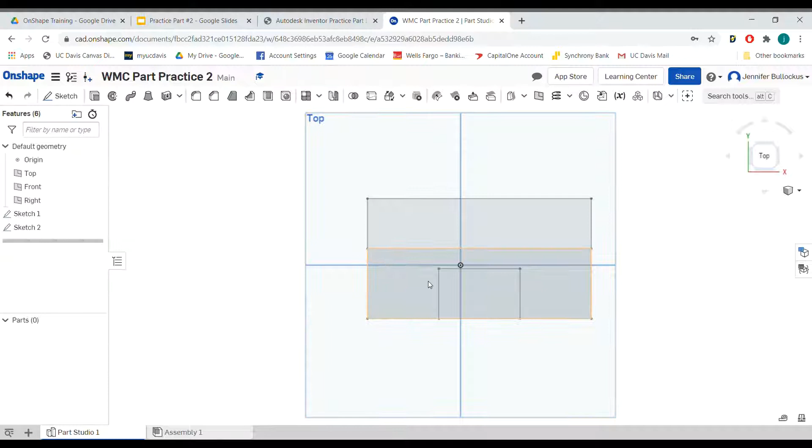Okay, now that we have our two sketches here, we can go ahead and start extruding. So I'm going to hit extrude, and I'm going to extrude this back feature here first, and that is going to be 80 millimeters tall, so we can go ahead and hit enter.

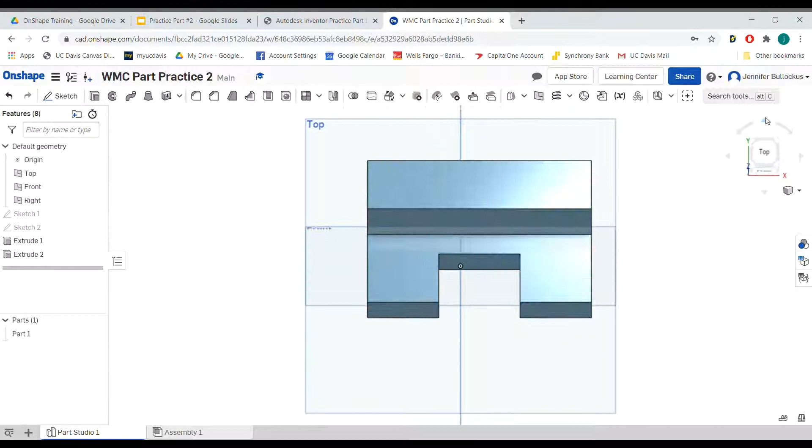And we can see here that it extrudes it. And then next we're going to extrude this section right here, so we can see that it highlights just the part we want extruded, and that is going to be raised to 30 millimeters. We go ahead and hit enter on that, hit OK, and we can see from here we've got the nice shape going that we want with the nice cutout going on. Alright, cool.

So then the next thing we can do is go ahead and do the two holes. So we're going to need a front view for this, and we're going to...

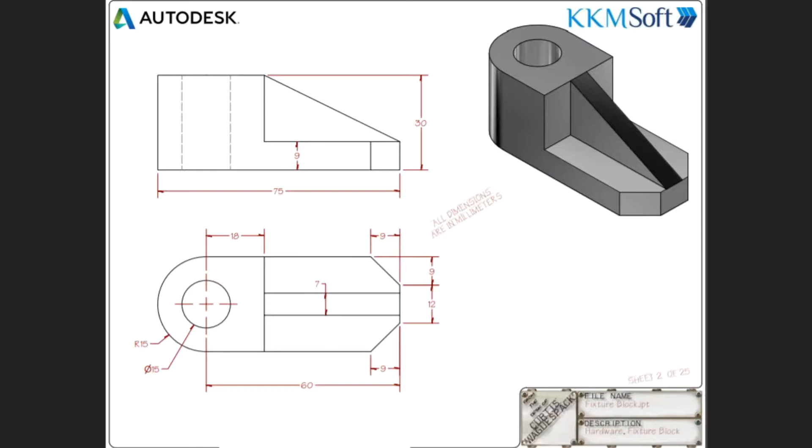Alright, so we have our document here set up on OnShape for our part practice number 2. And the first thing I'm going to do is, just like last week, check our workspace units, because it's automatically set to inches, but all of our part drawings from this Autodesk Inventor practice set are in millimeters.

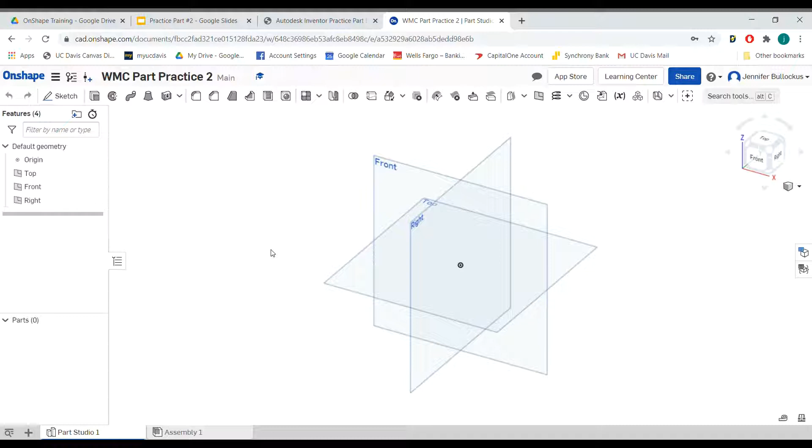We're just going to go ahead and put it in millimeters for convenience. Okay, so the first thing I'm going to do is pick the top view and go ahead and draw the base cube or square of our part here. So go ahead and sketch. I'm going to sketch with the top view. Click on the top view so we can see it clearly.

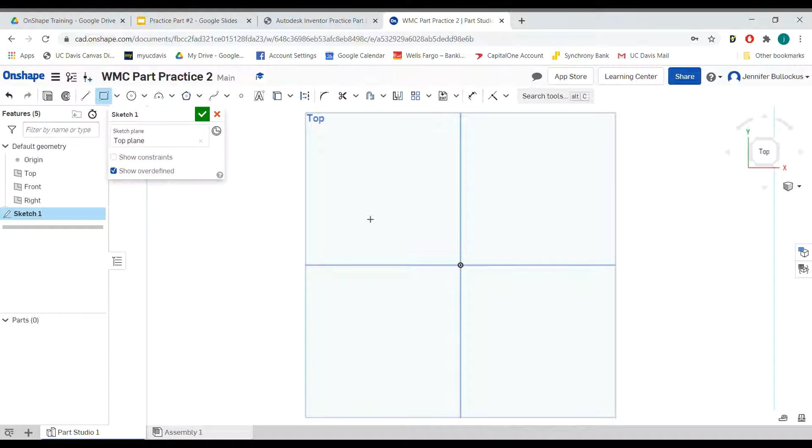And then the base of our rectangle here is 60 in depth. Okay, well, let me first draw the rectangle, that would help. So go ahead, draw a rectangle, and it looks like it's 60 in depth. Oh, let me escape the sketch, then dimension here. It looks like it's 60 in depth.

There we go. And then it's 35 plus 40 plus 35. So you can go ahead and do that math in your head, or, no, I don't want to dimension that, I want to dimension this length. So anyway, you can either do the math in your head, or you can just type 35 plus 40 plus 35, and it'll do the math for you.

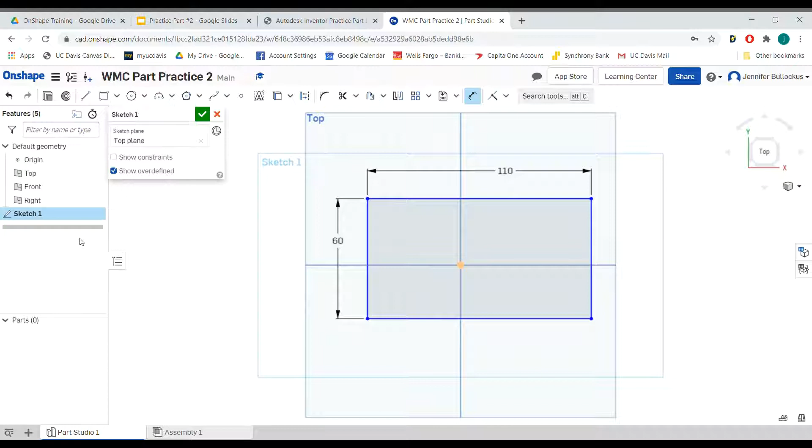Easy peasy. Alright, cool. And then what I'm going to do to add to this sketch, like I did again last week, is because two different sections will be raised to two different heights, I'm going to go ahead and draw a line so that when I do, what's the word for it, when I do extrude it, it's going to make it a lot easier. And this is set, let's see, 25 from, so let's go ahead and dimension that.

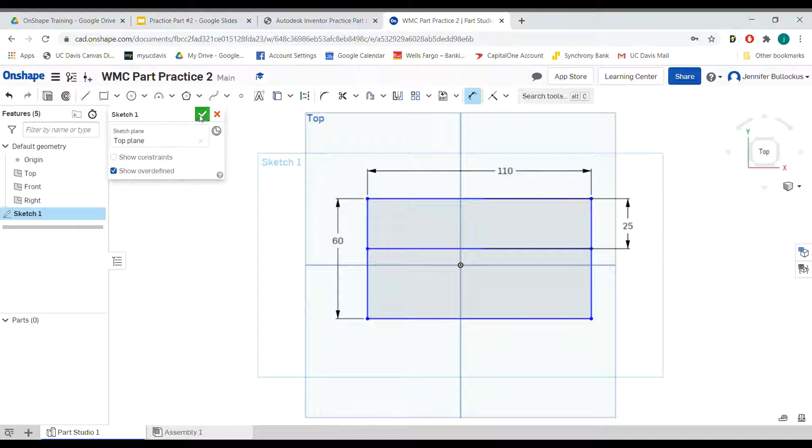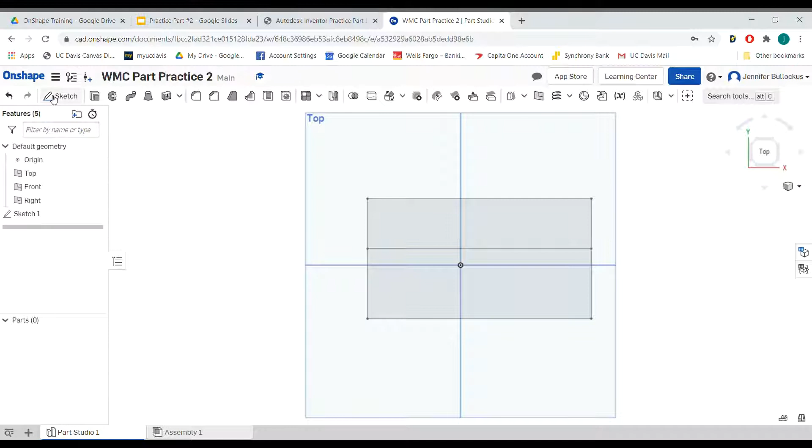Alright. Now we have our first sketch here, and now we have two options to proceed. We can either draw in our sketch now of like the cutout we're eventually going to do when we extrude, or we can wait and draw it on the surface after we extrude. I personally like to have all my sketches in at the beginning, so I'm going to go ahead and sketch it now.

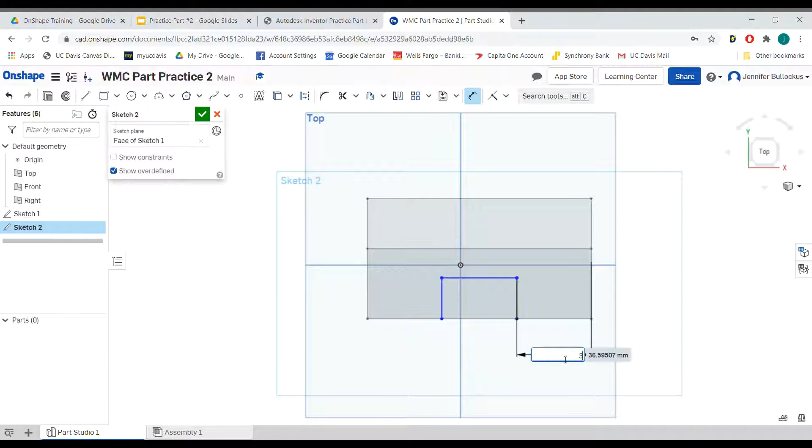And for this one, I would recommend just doing lines instead of drawing the box, so that way you can dimension it an appropriate distance from the other lines without having the constraint of it being a rectangle. So first, the distance from here to here is 35 millimeters, and then we want to mirror that on the same side.

Since we've set up this shape, the length of the entire rectangle will automatically be 40. If we add that measurement now, the drawing will become over-constrained because we've already marked the entire length of this rectangle. Adding the 40 will over-constrain it, and we'll get errors from Onshape saying we've put too many limitations on it. The height here is 25.

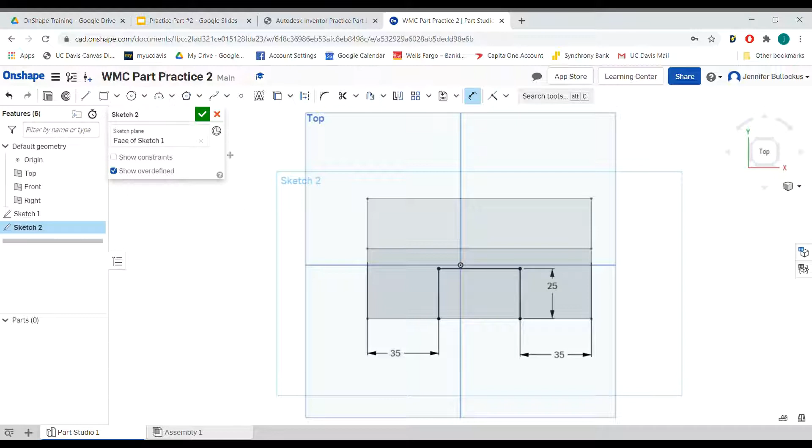Now we have our sketch fully defined on the face of the other sketch.

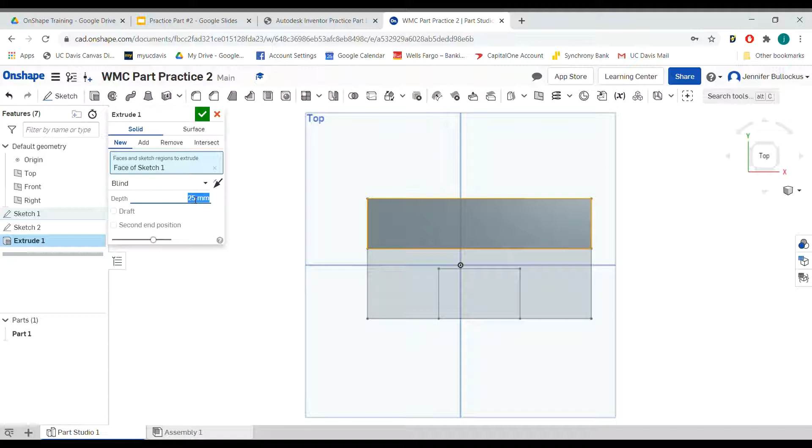Now that we have our two sketches, we can start extruding. I'll hit extrude on this back feature first, and that's going to be 80 millimeters tall. We can hit enter, and we see it extrudes.

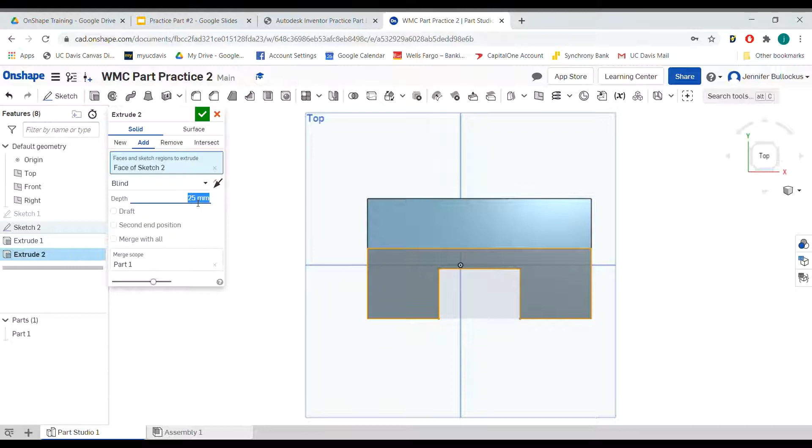Next we're going to extrude this section right here, so it highlights just the part we want extruded, and that's going to be raised to 30 millimeters. We hit enter on that, hit OK, and now we've got the nice shape we want with the cutout going on.

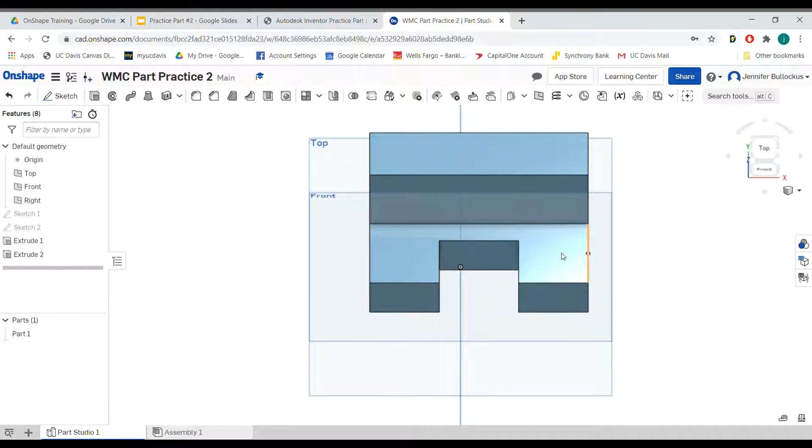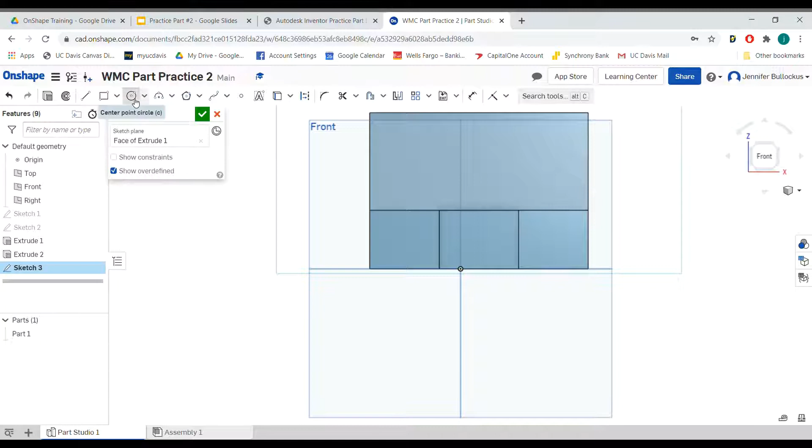The next thing we can do is the two holes. We'll need a front view for this since it's time to drill the holes. We'll add a sketch on this plane, then click on the circles tool and add a circle right here, and another circle right here.

When dimensioning these holes, you need three different kinds of measurements. If you imagine this as an XY plane, you need its X direction, its Y direction, and then its depth, or any information about the hole itself, like sinks. So X, Y, and the depth of the hole are the three measurements you need.

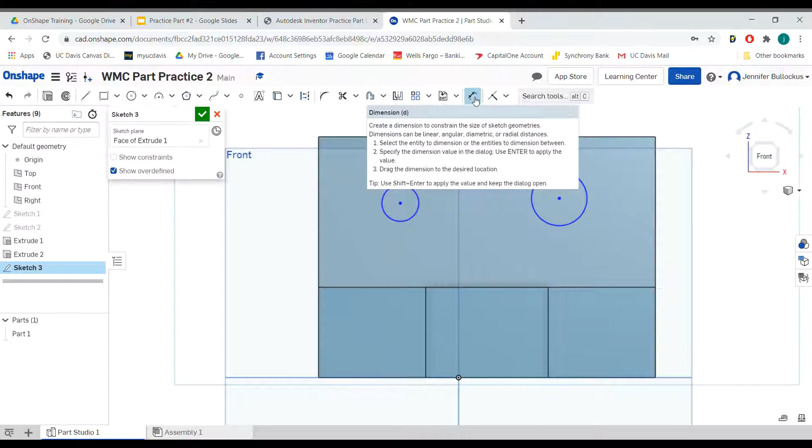First, our radius of the hole looks like - let me escape this and take a look. Right here it says diameter 6 through, then it has this symbol which means a counterbore, 12, 5 deep, and then 2 place.

That means 2 place - starting from the bottom, this is true for both of the holes. 6 through means the diameter is going to be 6 all the way through. Then this counterbore is going to be 12, which is like double the diameter of the through hole, and it'll be 5 millimeters - I might be saying inches but I mean millimeters for all of these - 5 millimeters into the hole we've drilled, or into the surface.

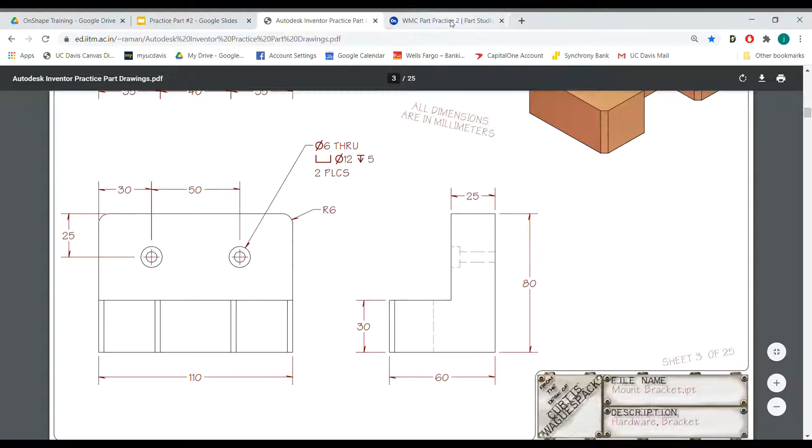So this needs to be 6 millimeters, as well as this one.

When it comes to dimensioning holes, there are two ways to do the X and Y direction. The first one is to start with a zeroing point. So let's imagine this is our 0, continuing this X and Y analogy, like an XY plane happening here.

We're going to measure the X direction of this circle, and we need it to be 30, making sure we're clicking the center - it's 30 from the center, not the edge of it. Then we need the Y direction, dimensioning from the circle to this line.

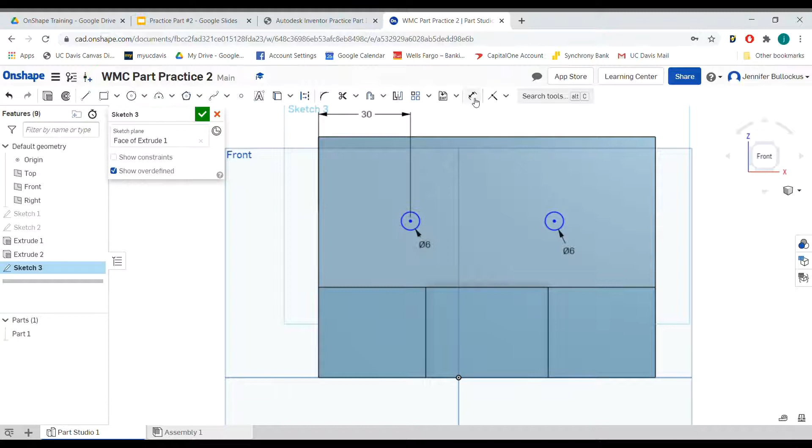Sorry, I need to do the Y direction, from the circle to up here. Okay, 25. So we have this hole dimension right here. We've got its depth, we have its X, and we have its Y.

Now, dimensioning this hole, we don't want to dimension it the way we might think. We could start dimensioning it the same way we did on this side, reflecting it on this side and dimensioning using these lines. But the reason we don't want to do that is because when we have to machine this part...

You will learn later on how to machine if you haven't had that experience yet, but we have to zero a point on the machine. So if we're going to be drilling this hole, we put our drill bit against the edge of the part, and we mark that as our zero, so that when we move our drill bit, like the 30 millimeters we need to drill this hole, this is our marker, 30 millimeters from this point.

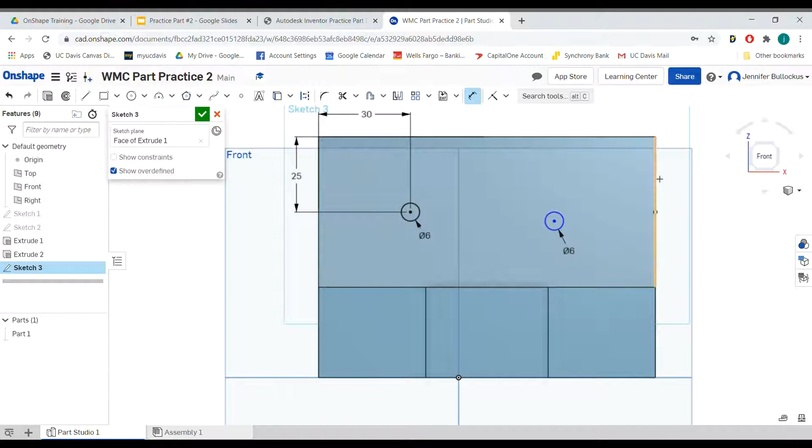So if all of a sudden we start measuring from this side for this hole, then the machinist is going to have to re-zero their machine, and instead of using this line, they're going to have to reset up their part so the zero starts from here, and then the machine will count 30 millimeters this way. That is just not efficient, not a good way to set it up.

So we want to use the same line, the same axis. Imagine this being the x-axis, this being the y-axis. We want to measure from these lines and not pick a new axis to measure from. So with that being said, we have two ways to do this.

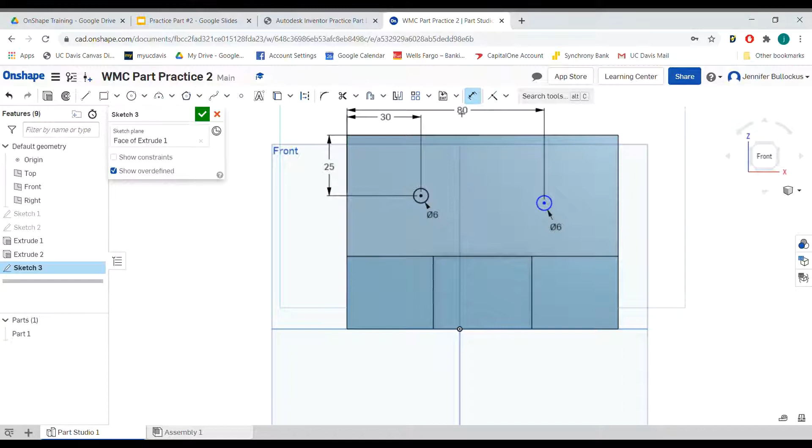We can either measure this hole along the x from our x itself, so that way we have another one, because it's measured 30, 50, so you can do that and have it set to 80 like that, and then you just know from this zero you should go all the way to 80.

Or another way you can do this is you dimension from this hole, oh, I don't have the dimensioning clicked, from this hole to this hole. And the reason you could do that is it's this method, called a cumulative method.

So once you get to this point, which you're going to have marked out on your machine, it will know you've gone 30, and then you can go another 50 from there, and you don't have to restart from the zero, or make the machinist do the math of 80 minus 30. Either way works, as long as we're, like I said, using this as our reference point, our zero.

And then we're going to go ahead and measure the y direction of this as well. Oh my goodness, sorry, y direction. Here, and set it to 25.

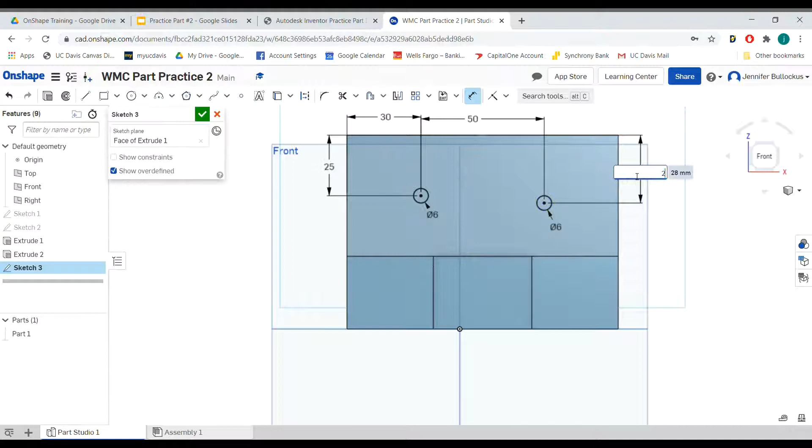Cool, so now these two circles are in line, and they're dimensioned from the same axis, and it's easy for the machinist to go ahead and machine this part.

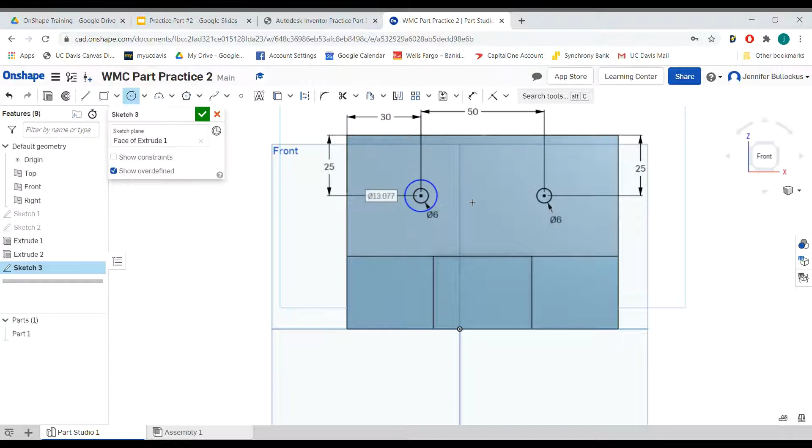The next thing we are going to do is add the circle, in addition to these circles, that's going to eventually be the counterbore. So I'm going to go ahead and add a sketch of a circle, making sure that my center is the exact same center as the other one, so that way the holes are lined up when I dimension them.

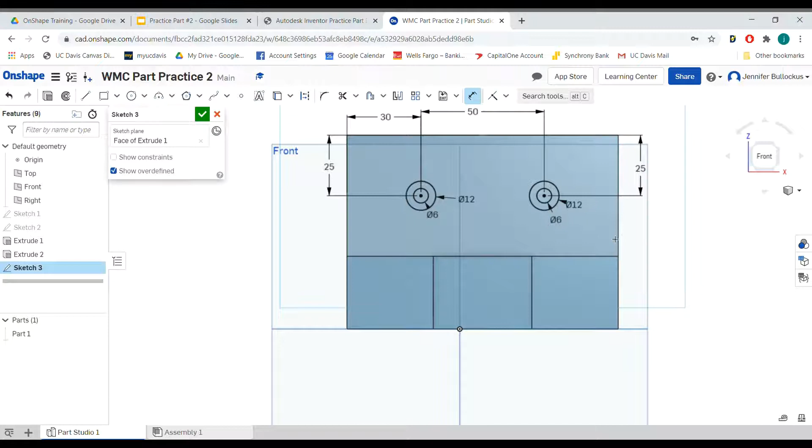So let's go ahead and dimension this diameter, which is 12, and this one will only be going in 5 millimeters, while the 6 millimeter diameter hole will be going all the way through. I'll show you how to do that in a minute. So go ahead and click OK on this sketch.

And now it's time to extrude. So when we hit the extrude feature here, what we're going to want to extrude is this one and this one, and we're going to want to remove. So click remove, and you can do through all like that.

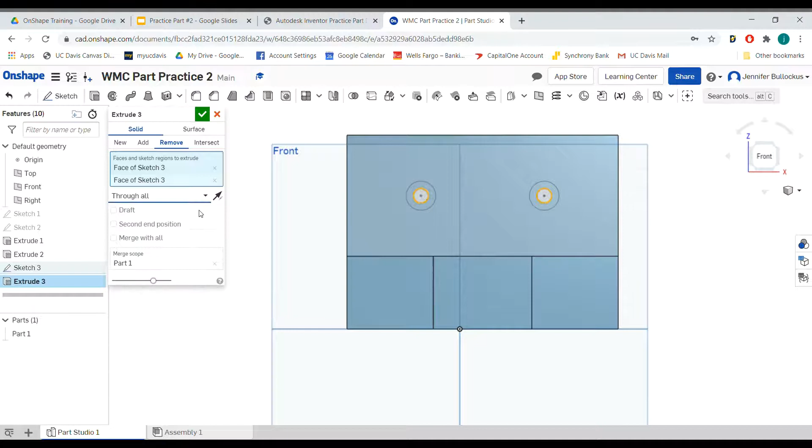Clicking through all means it's going to go through anything that's there. Even if we had several layers of stuff, we're just going to cut through all of it, and we'll hit OK. And as we can see here, now the hole is all the way through, front view. Then we got the hole all the way through.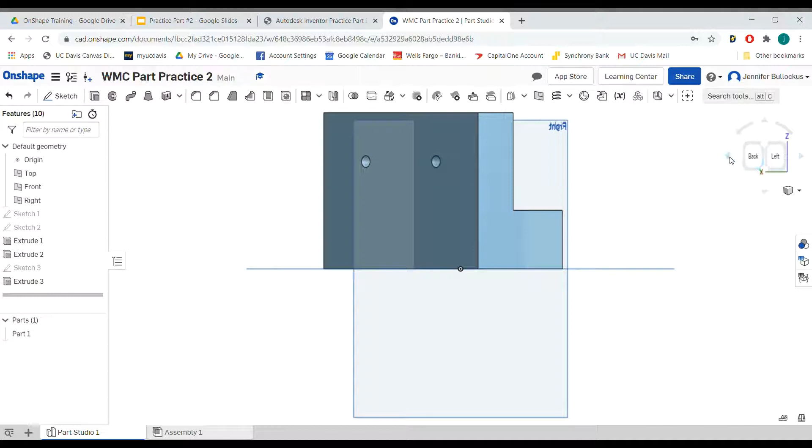Okay, so now going back, we're going to make our sketch 3 visible again because now we need to extrude the countersinks.

The reason we have this countersink is because the head of a screw is bigger than the threaded part. So if we don't want the screw emerging from the surface of our part, and want a smooth surface instead, we create this countersink so that the very edge of the surface is smooth and the screw won't bulge out.

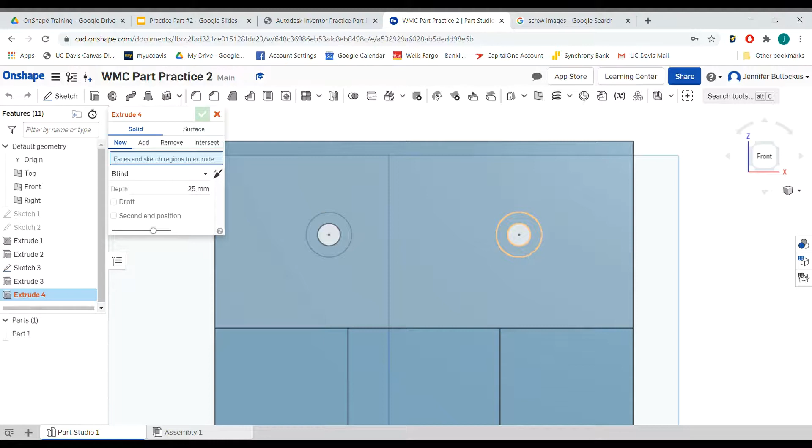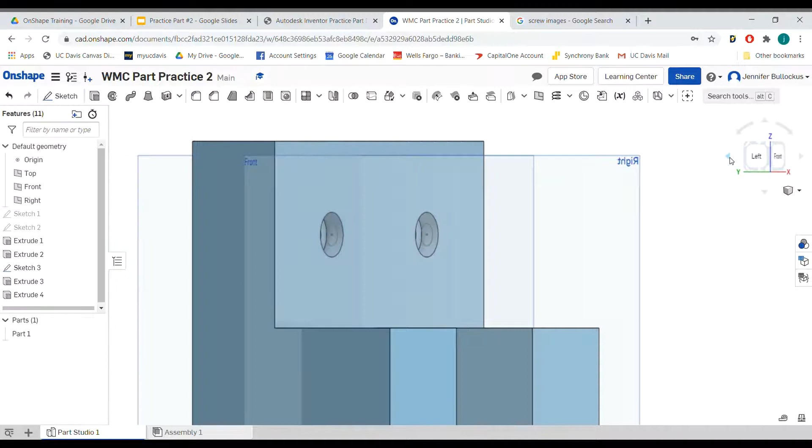To do that, we're going to extrude once again. Click the larger circle shape, then it's going to be a remove, and the depth is only 5 millimeters. We click OK. You can see from this angle that the countersink only goes 5 millimeters in, and then the rest of the hole goes all the way through.

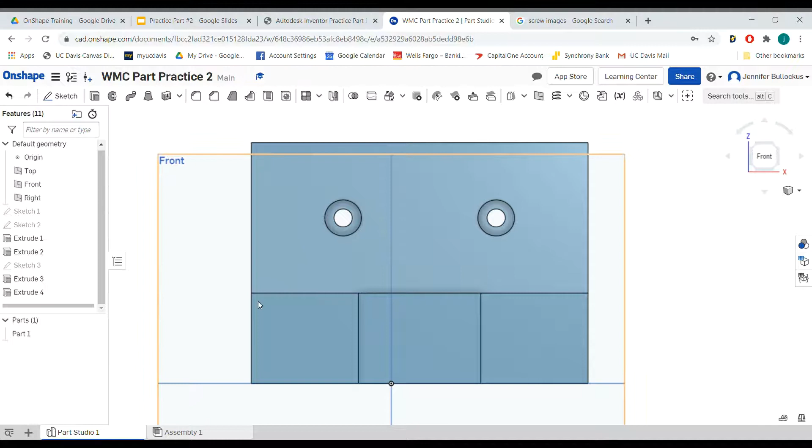Now that we have our part, the last step is to add the chamfer and fillet at the top so we can make these edges. We want to cut off these edges here and then round these corners. This feature is found right here.

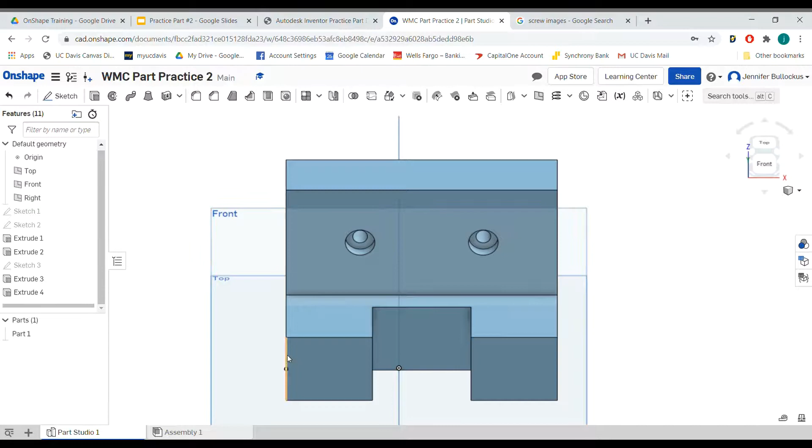So we have the chamfer and the fillet. For our chamfer, on this part it says 3 times 45 degree chamfer, meaning the angle is 45 degrees for a perfect cut on each side, and they want 3 millimeters off. So we're going to hit chamfer here.

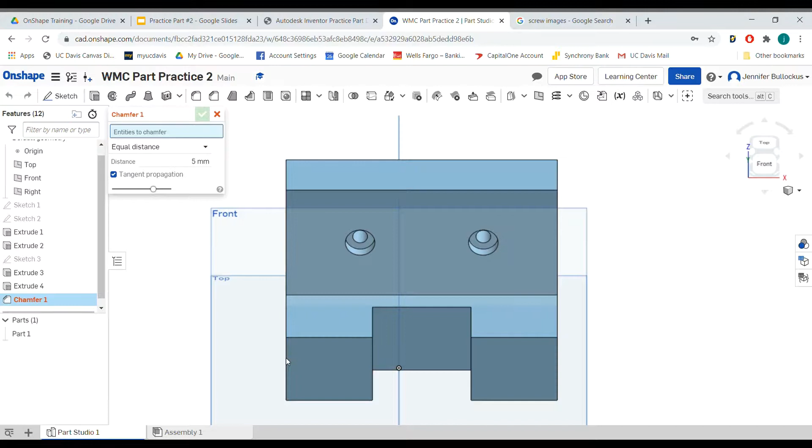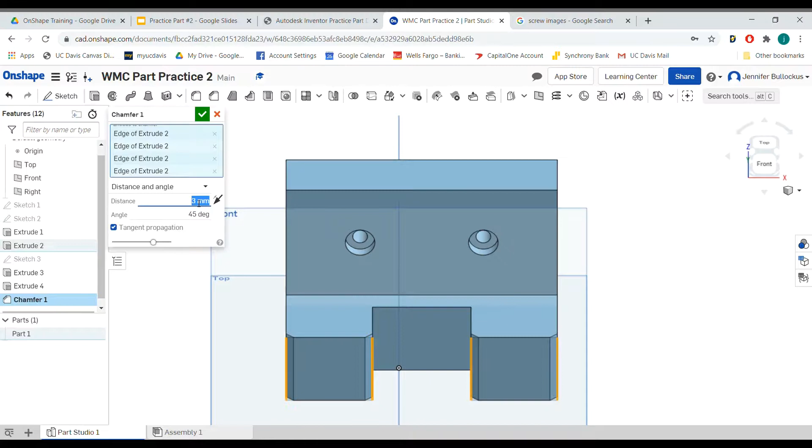First let's click on the entities to chamfer: this line, this line, this one, and this one. They'll all get the same chamfer, but we don't want an equal distance - we want to set the distance and angle. The angle is 45, but the distance is only 3 millimeters. After that, we click OK.

From the front view - let's take you to a top view here - we've got the nice chamfer edges like we do in our part drawing. Now our last step is the fillet.

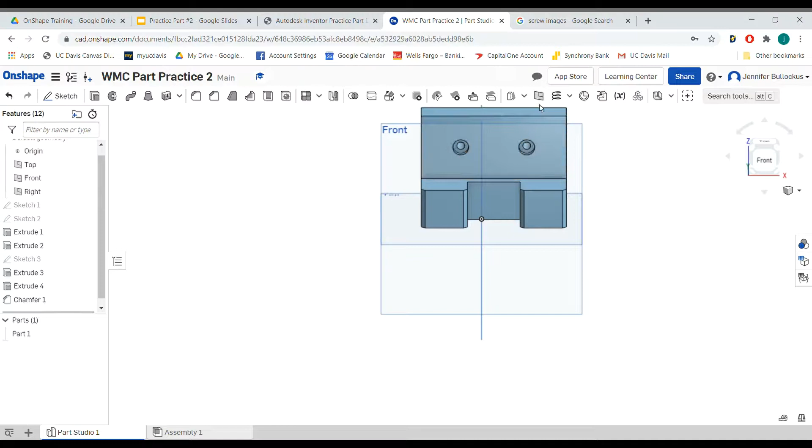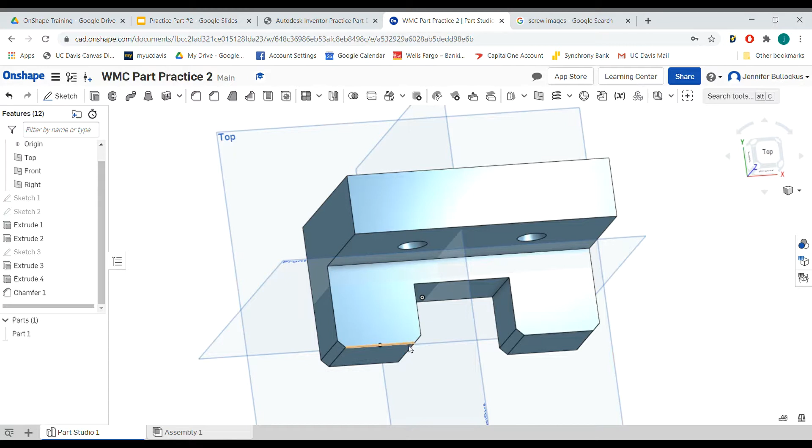Now we've added our chamfers, so it's time to add the fillet at the top. The difference between chamfer and fillet is that chamfer is literally just cutting off the edges - we still have that sharp angle, just with the tip cut off. Whereas for a fillet, we're going to be rounding out this edge.

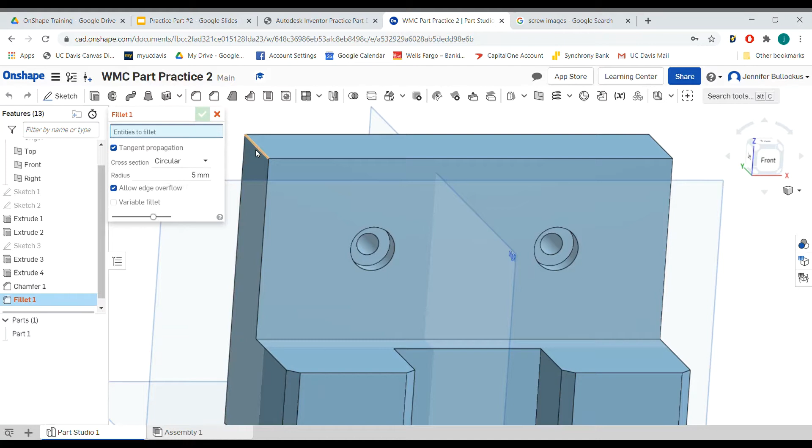First we want to click on the fillet option, and then select just this edge and this edge. In our part drawing it says R6, meaning we want a radius of 6. Its cross-section is circular - you have other options, but we want it to be like a circle, literally just rounding off this edge, with a radius of 6.

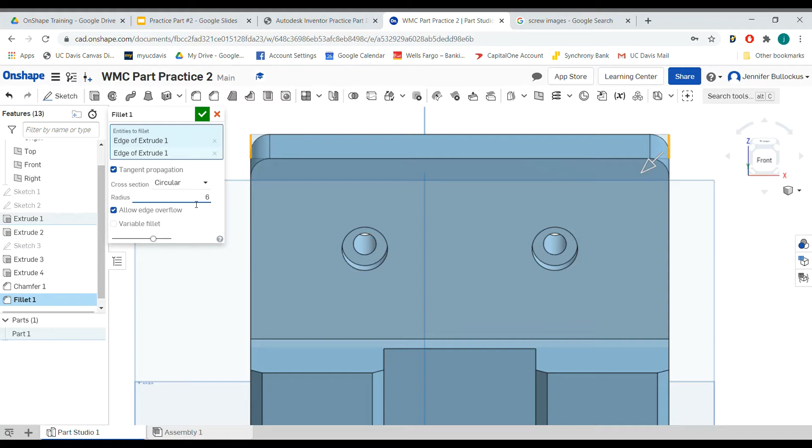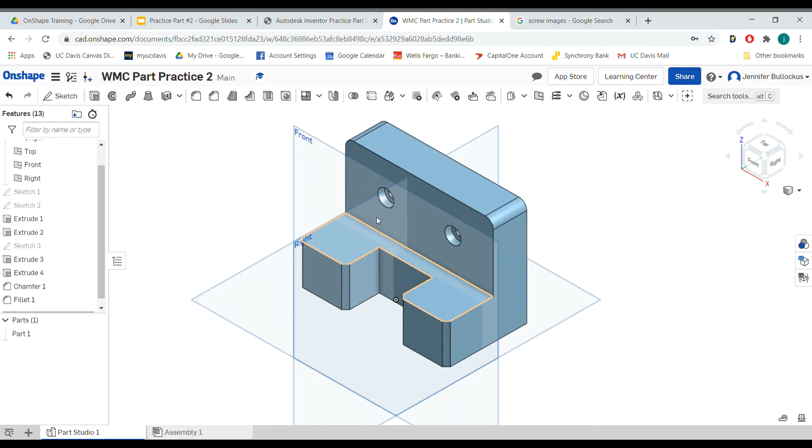Hit OK, and now we have before ourselves the nice finished project. Here's an isometric view of our part - in case you missed how I did that, you click on this here, and isometric is the nice angle where you can see the front, top, and right view all at the same time. So this is our nice finished part. Top view.